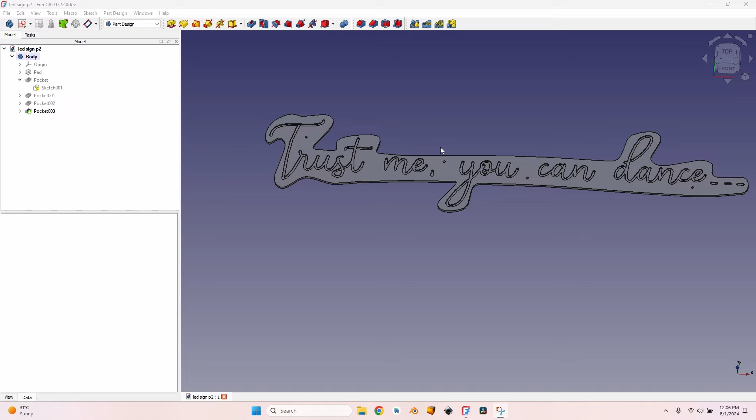Welcome to the second part of our sign making tutorial about making a piece of acrylic, milling it on the CNC in order to fit some LED strip and then cover it with a special silicone tube. In the first part I have shown you how to modify the font, how to recreate it in Inkscape and then import it into FreeCAD in order to get the consistent width channels required.

We have also created some holes in the end of each word to fit the wires and some holes for fixing the piece of acrylic onto a piece of wood. It's the way it's going to be installed in the end. And in this video I will show you how to create the path from start to end and how to mill it on the CNC.

The biggest challenge was milling a piece with a 2.1 meters length on a CNC that only has a table of 80 by 80 centimeters. That's my CNC. It's pretty small. I have custom built it this way because I have a small workshop, but I need to make certain things larger from time to time, so I will show you the method that I use to make that.

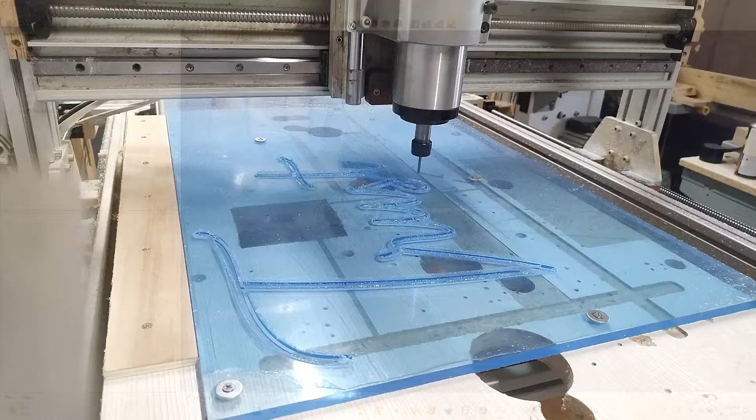One of the biggest challenges when milling acrylic is the cutter, the feed speed, the spindle speed. So let me explain a little what I have used. I have used a 4mm end mill, and the speeds that I used with that cutter are 2500 millimeters per minute and a spindle speed of 11,000 RPM. I've used those values with a step down of 1.5 millimeters.

Those are the values that I found suitable for this type of material on my machine. You might want to modify them a little to adjust them depending on the machine, on the cutter that you have, but for this type of cutter and my machine, this works like a charm when cutting acrylic.

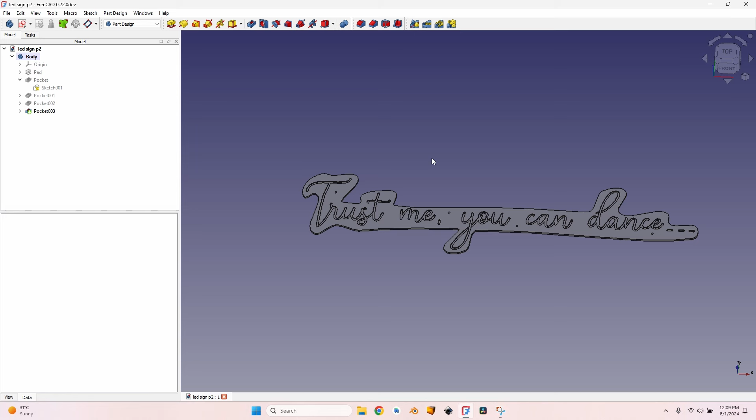So let's get started. I will select the body, the sign, go to the CAM workbench and create a new job. Everything seems okay, but it isn't, because I want the sign to be on the y-axis. I want it to be rotated on the y-axis because that's the direction that has clearance. I can move the piece of acrylic outside of the table.

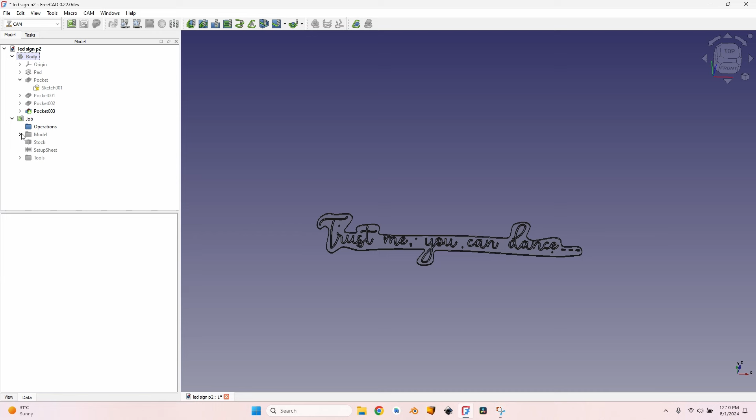So first of all, click OK on the job. We will come back later to the job to edit the tools and everything else that needs to be edited. But first let's go to the job, open the tree, open the model, select the copy of the body that has been automatically created, go to edit, placement and rotate it around the z-axis 90 degrees. Click on apply, click on OK, and now double click on the job again, go to the setup tab and click on the refresh button next to extend models bounding box.

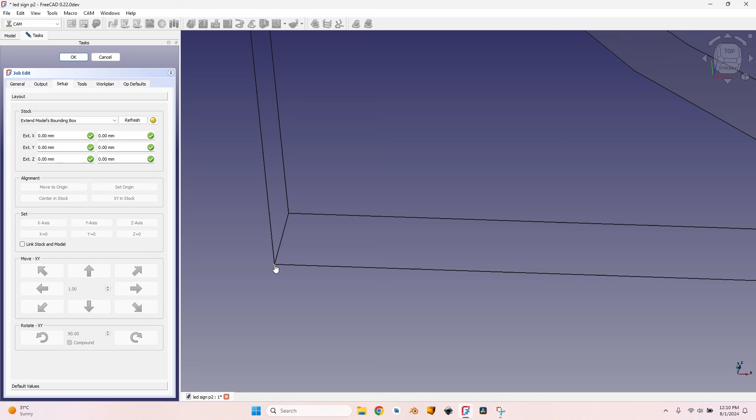Now we need to place the origin here, so I will zoom in, select the point in the corner and click on the set origin button. Now you can see that the origin is correctly placed. The piece of acrylic is vertical, it's on the y-axis just as I want, so I can move it outside of my CNC. And now let's go back to the tools menu, click on add to add a new tool controller to the job. I will select the 4mm end mill, as I've told you that's what I'm going to use. It's an upcut bit.

Click on open and let's give the horizontal and vertical speeds of 2500 millimeters per minute and the spindle speed of 11,000 RPM. I can now remove the default tool, I don't need it anymore. Go back to the setup tab. Here at the bottom you have default values. I will set a step down of 1.5 millimeters. I want to set it for the entire job so I won't make any mistakes and maybe damage the cutter. I have broken several tool bits when trying to find the right solution for milling acrylic.

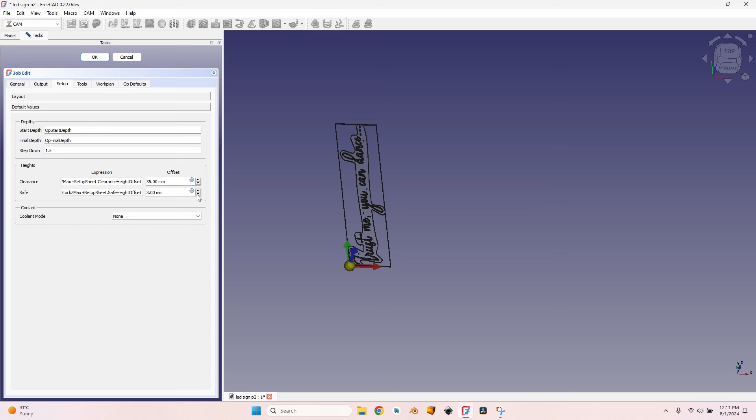I will also set a clearance of 35 and a safe height of 3 millimeters. Go to the output tab, make sure the processor is the correct one. I won't enter a file name, it will default to the file name of the FreeCAD file, so it's okay for me. And click on OK to close the job. Now we need to make three operations.

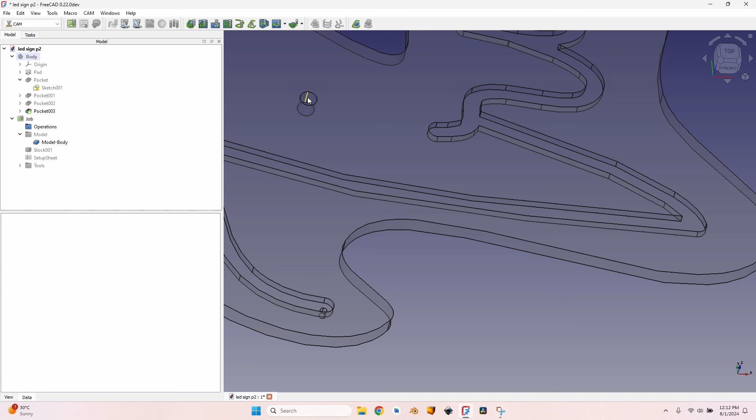The first one is to mill the holes, the small holes in the end of the letters for passing the cables, the large holes for fitting the piece to the piece of wood. We also need to make the pockets and the profiling, the cut of the outside, the weird shape that we have created for making a fun shape for this sign.

So the first thing that I need to do is click on the job, go to the helix button. It will take some time to open up the dialog because FreeCAD tries to automatically detect all the circular holes in my file. So I have all the 4mm holes for the cables and the 10mm holes for the screws. Go to the operation tab, change start from outside to inside. I don't want to have a little piece of acrylic left in the middle because it might break, move around in the space and maybe damage the cutter.

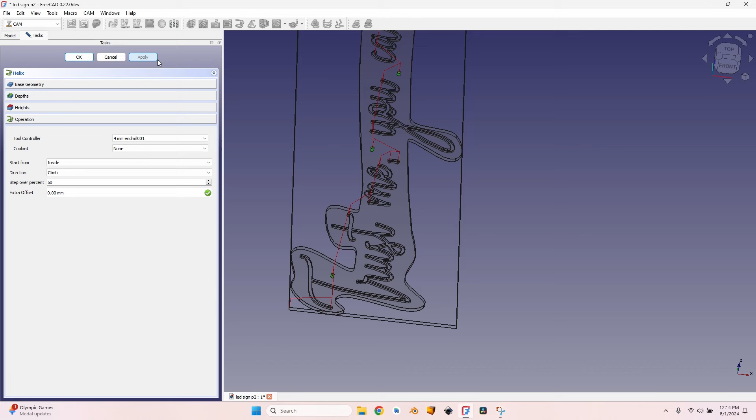Leave the step over to 50%, click on apply, and you can see that the path for milling all the holes has been generated. Click on OK. The operation is all that I need, and now let's create the pocket. For making the pocket, I will set a top view and holding Ctrl down, select all these faces that compose the text, the comma, the dots at the end. Make sure you select just the faces, not lines.

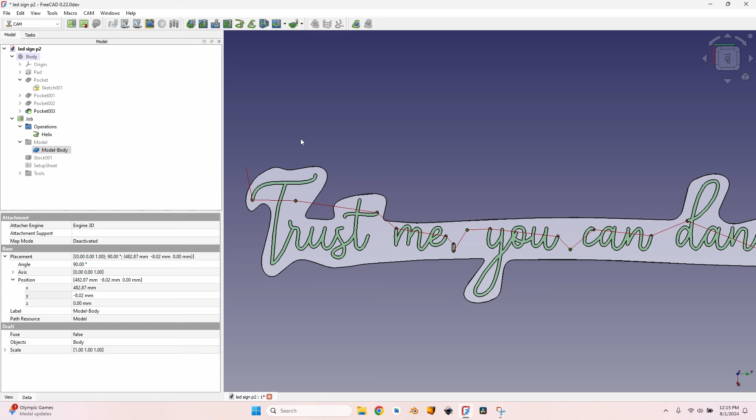And now, after making sure everything is selected, I will use the pocket button. I will modify the pattern, set it to offset. Zigzag in such thin spaces would be a mess. Set a step over of 70%. That should be enough in order to correctly clear the inside. The outside will be cleared anyway because the pattern is set to offset.

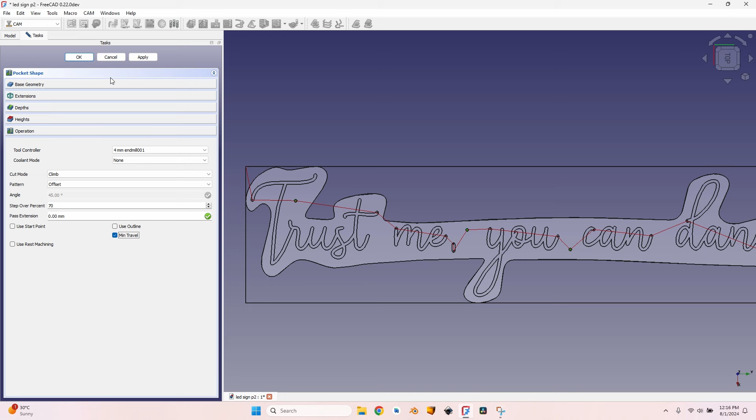Go to the depth tab, make sure you have the correct step down, the correct start depth and the correct final depth. I want 5 mm deep channels in the acrylic, so it's okay, a start depth of 10 and the final of 5. I will also check the min travel. I want to reduce the air time as much as possible. The movement when the cutter head is not cutting, I want it to be as small as possible, because anyway it is a pretty large project and it will take some time with such a small tool.

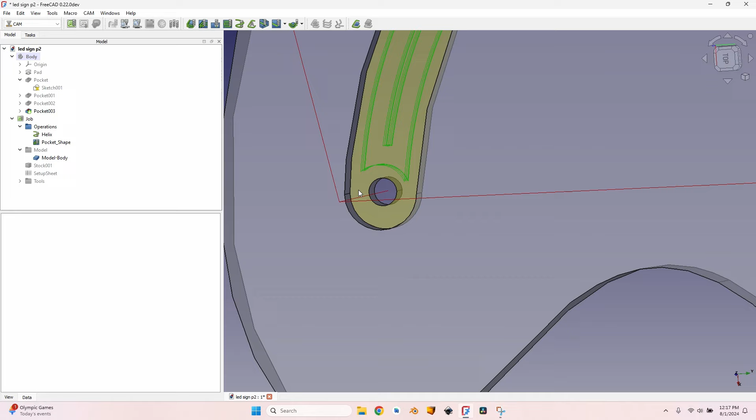And I can now click OK to generate the path for the first time. It will take a lot because FreeCAD is not the best when working with Bezier shapes. So once the path is generated, let's make sure everything is okay. I kind of know where there are some problems. You can see here at these holes, since the cutter head won't fit through this small piece of acrylic next to the holes, it simply won't cut this whole piece, which is something that I don't want. It happens around all the holes. You can see here also the lines, the comma.

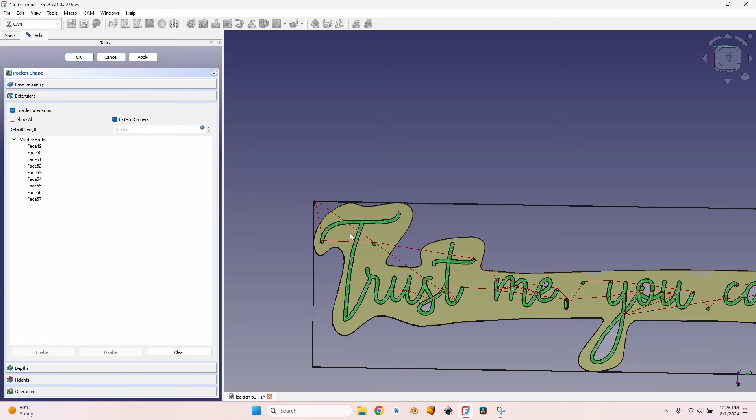So double click on the pocket shape again, go to extensions, check enable extensions. I know this is an intense computing thing and it will take some time, but it is something that I have to do. But unfortunately the extensions simply don't work. You can see here it won't see any edge to extend even though there should be. So we have to find another solution. Click on cancel. Don't ask me why FreeCAD is recomputing everything. When clicking cancel, it should just revert to whatever was in the first place, but this is the way it does things.

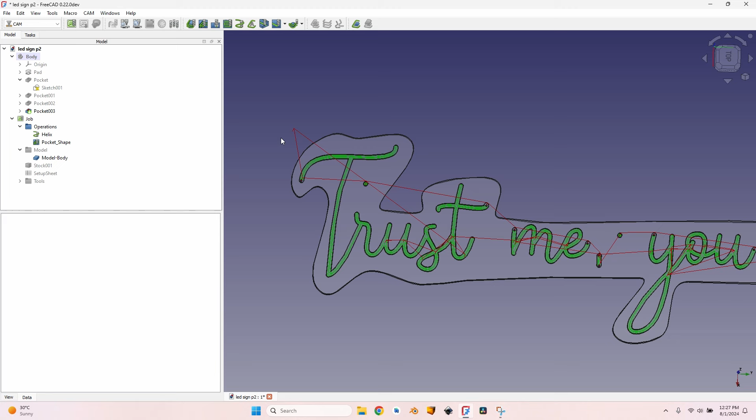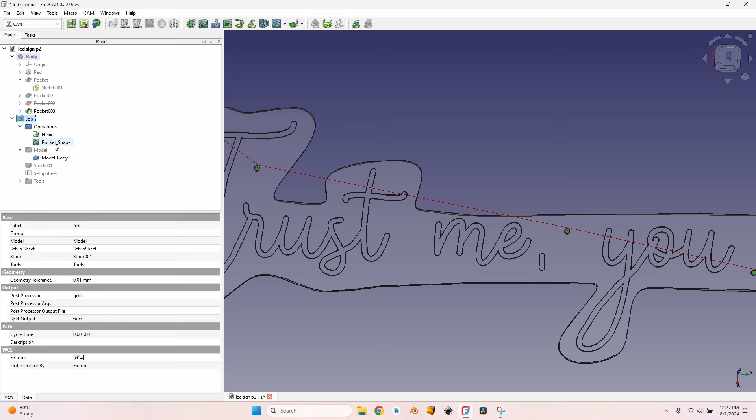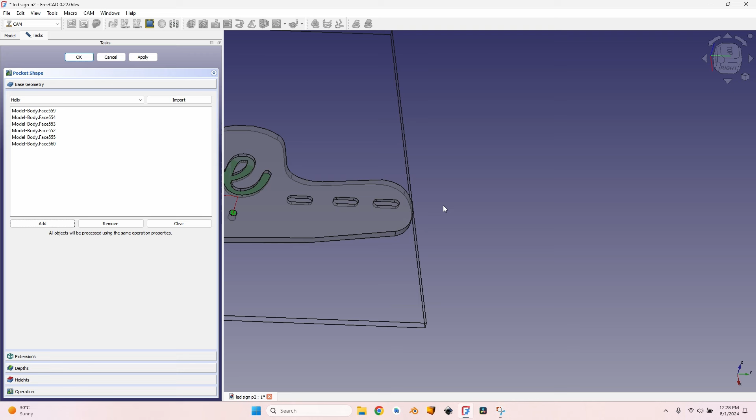But there are some issues with the pocket because the face names have changed and the code in the CAM workbench hasn't yet been changed with the topological naming problem solved. So let's clear the list and re-add the faces again. Click on OK, and now the path should be generated correctly.

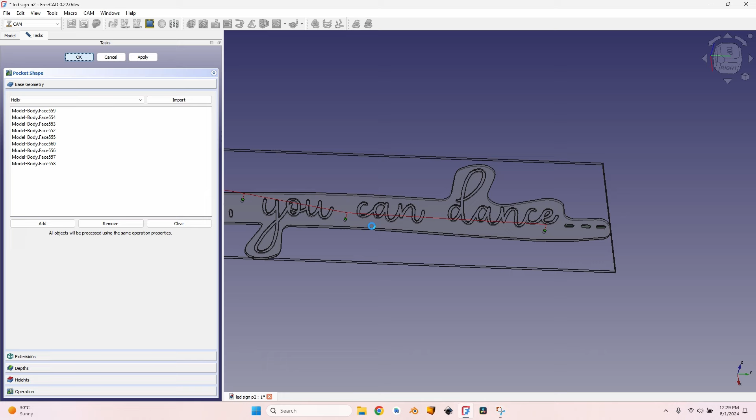Of course, you can see that all the holes at the ends of the letters are now not included in the helix operation, and that's something I will show you in the end when exporting the job, how to solve that issue by exporting the G-code files with different features in the body, suppressed or not. So now my CNC will mill the entire shape of the letters, no stopping at the end where the holes were. Of course, I will have to make separate exports for the pocket shape and the helix.

I could open the properties of the pocket shape, and as you might have seen in all my other videos, when milling wood I always change the keep tool down from false to true.

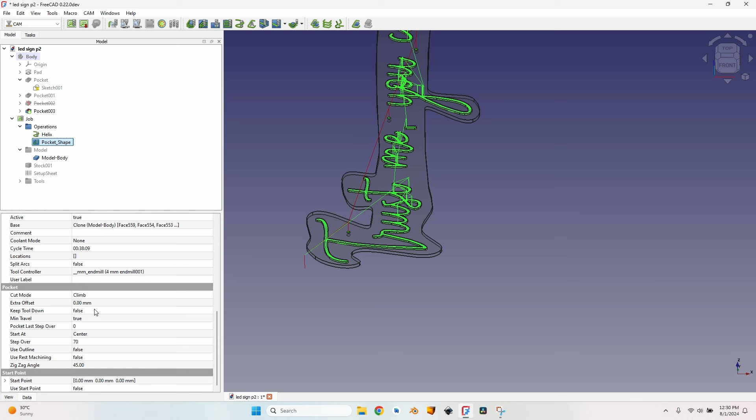This time I won't do that because I'm milling acrylic, and the lifting of the cutter head gives the cutter bit some time to cool down in order to avoid sticking the material to the cutter head. So this time keep tool down is okay to be left to false; even though it might take more time, it's safer this way.

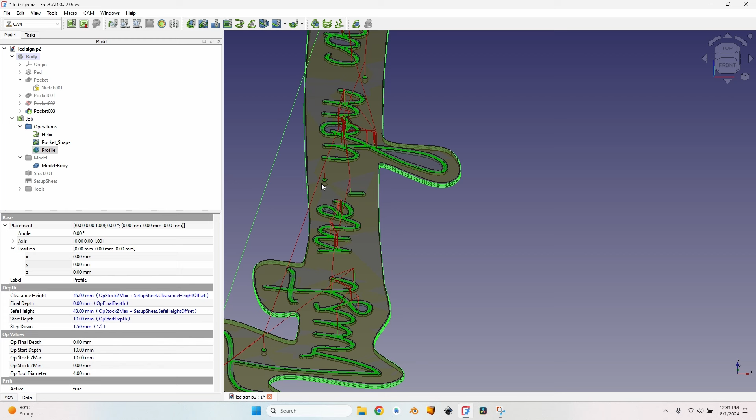Now let's do the final operation, the profiling. Just leave everything as is. Click on apply and you can see the profile milled. You can also add some tags that you can cut by hand, but for holding down the material on the table I will use all these holes. I will first mill them, then stop the machine, put screws into these holes, also drill some holes at the edges of the outside pieces, in order to not damage too much material, because all these large pieces can be reused, of course.

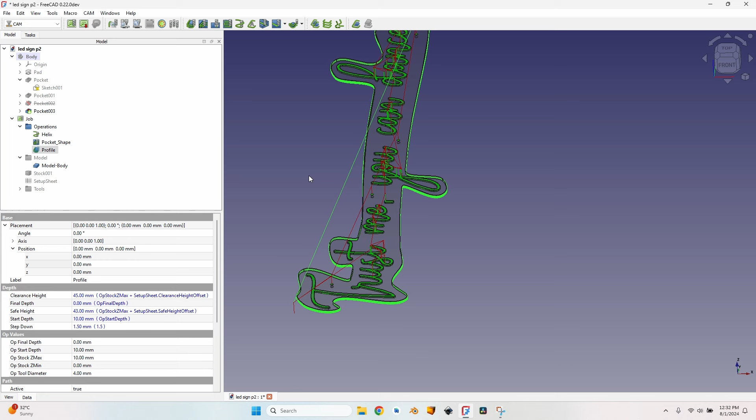And now I want to export all the operations needed. As you remember, the holes in the ends of the letter are not available anymore, but I will show you how to split the operation into 3 separate files so I can move the sign around. There's one more thing that I need to do in order to correctly shift the piece after milling the first part and after milling the second one. I need to add some reference points, and because this piece is 2.1 meters long, I will divide it into 3 separate cuts, 700 millimeters each.

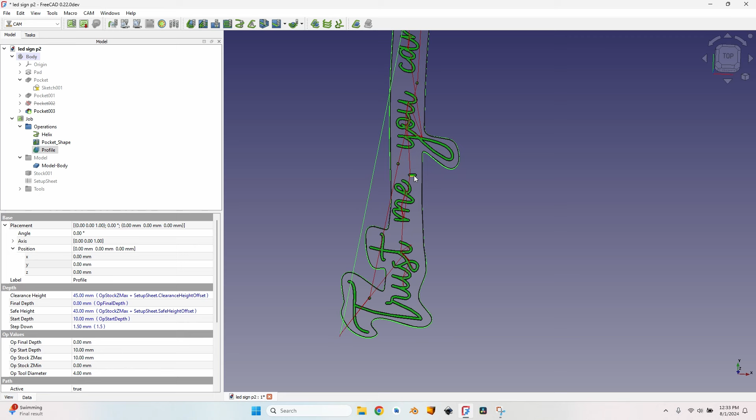So I need to somehow add some reference points, and I don't want them to be on the piece itself. Of course, I could use the comma or these holes as a reference point, but let's imagine that I don't have all these shapes at the exact same Y value. I will have a stopper here on the X axis, so the X will be the same, but I will need to manually adjust the Y axis.

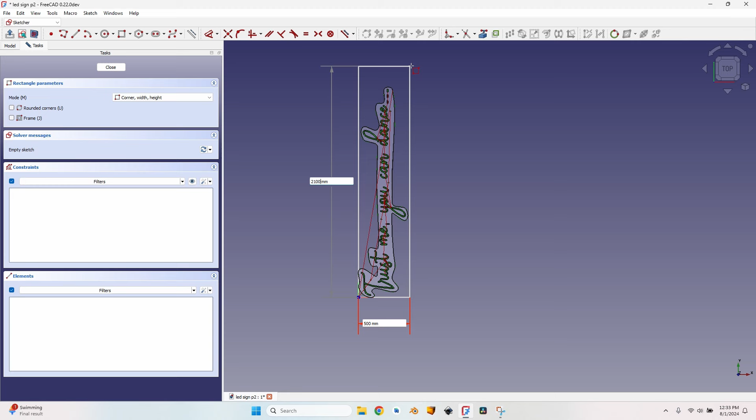So let's go to the Part Design workbench, create a new body, create a new sketch on the XY plane, make a rectangle, and I will give it a 500 by 2100 millimeters dimension. This is the dimension of our stock. Click on close, make a pad of 10 millimeters, and now you can see it covers the other sign. And I want to place 2 small cutouts here and here in order to be able to align when moving the part.

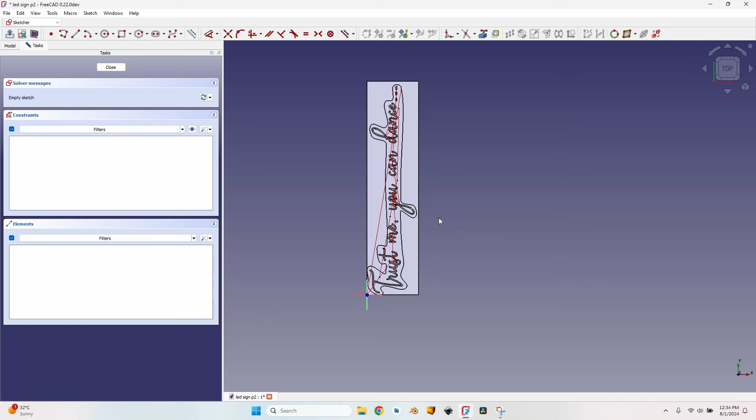So select this face, create a new sketch, and as I've told you, I want to split this cut into 3 separate cuts, each 700 millimeters, but I will actually create 3 cuts of 750 millimeters because I want some overlapping where the reference points will be. So I will create 2 rectangles. Let's give these rectangles an equal constraint for the bottom line, an equal constraint for the vertical line, and let's set a horizontal constraint. I want them to be at the same height.

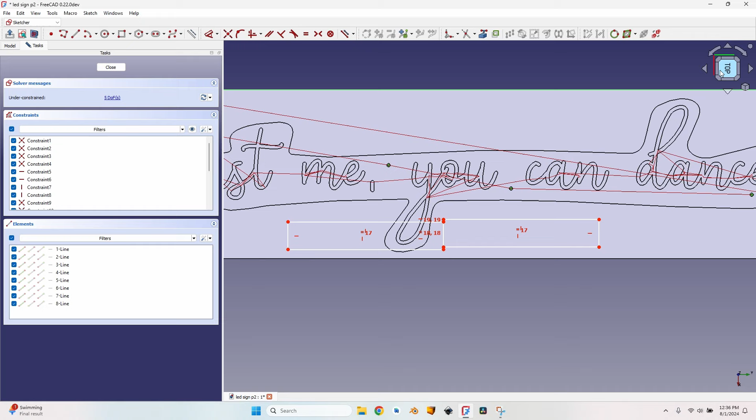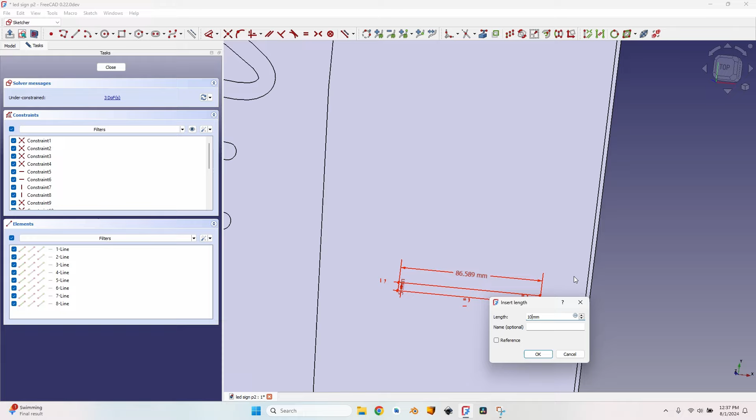And you can see something odd happened, because I used a horizontal constraint, but if I look at the coordinate system in the bottom corner or at the orientation cube, I'm actually rotated. So I have to delete this horizontal constraint, move them again, and set a vertical constraint, because this is the vertical of my sketch. Let me rotate the view so it's easier to use the correct shortcuts: I for a vertical distance constraint of 5 millimeters, and the length of this segment 10 millimeters. So my reference points are now correctly sized. I just want to position them.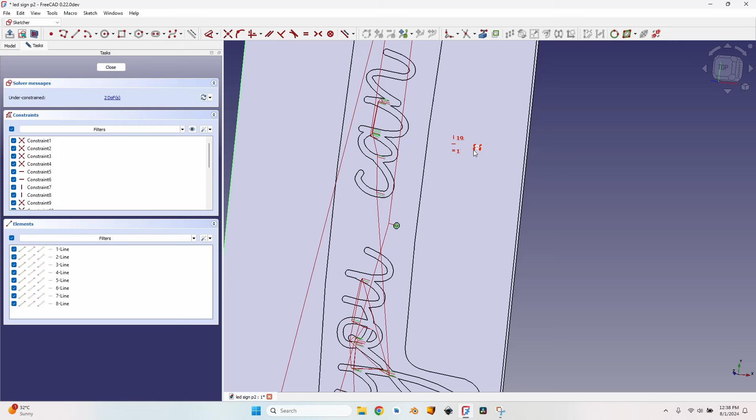For this one I will give a height of 710 millimeters. I will make the first cut 750, but then just move the piece 700 and it will start below this reference point, so I can move the cutter head to the correct position and make sure I have moved the piece as it should. And for the second reference point I will give it a height of 1420 millimeters. It still has a degree of freedom, the horizontal distance. I will set a length of 490 just to be at the edge to waste as little material as possible.

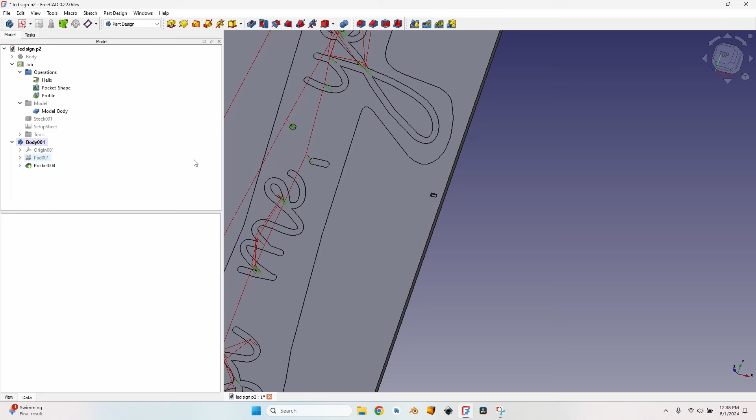Now I will close this body. You can see these 2 reference points; I have to make some pockets with them. I will make 5 millimeter pockets, and I will rename the body reference points. And now go back to the job to use those reference points. Double click on the job, go to the general tab. Everything will move pretty slow right now. I will show you in just a couple of seconds how to avoid this slow movement when making modifications to your job, such as adding a new body. But now I have to wait, and then I'll show you how to do things faster.

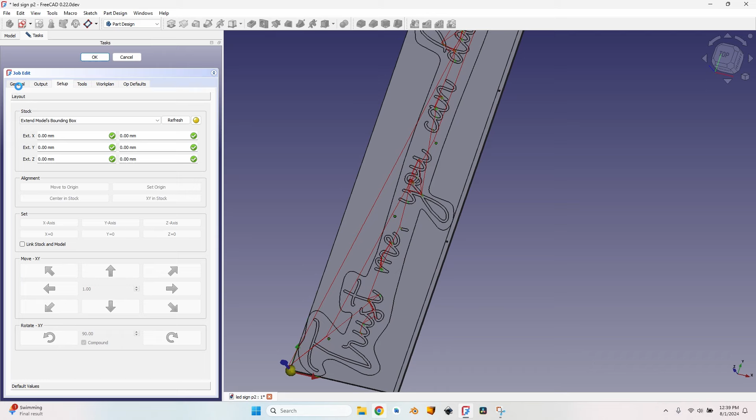For each modification it will take a long time to calculate everything. I will just click cancel. Again, it will take some time. I should have done this before opening the job. So before opening the job and modifying all the stuff here, I will select all the operations, go to the CAM workbench of course, and click on this button, toggle the active state. I want them to be disabled, and now everything will compute much faster.

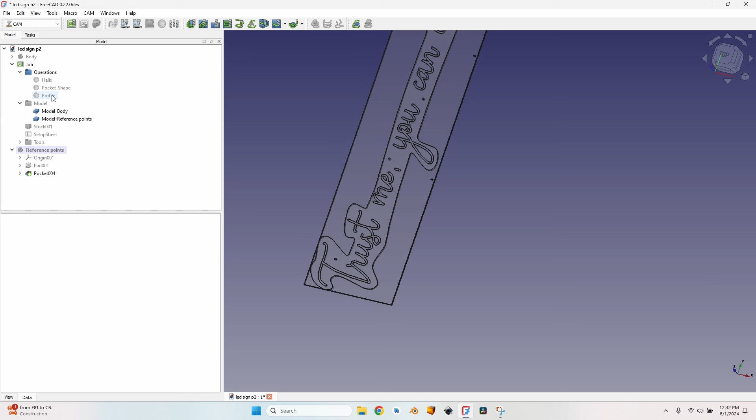So now double click on the job, go to the general tab, click on edit button, also add the reference points body, click on OK. You can see how fast everything moved. Of course, when re-enabling all these operations, I will have to wait for them to recompute, but it's going to be just a one-time thing. So now I have the body with the reference points.

Go back to the job. This is the part where I have to re-enable all the operations. Well, I won't re-enable the helix because I will export the helix later. As you remember, I have removed some holes from here and the helix won't mill them. I will activate them after exporting the pocket and the profile.

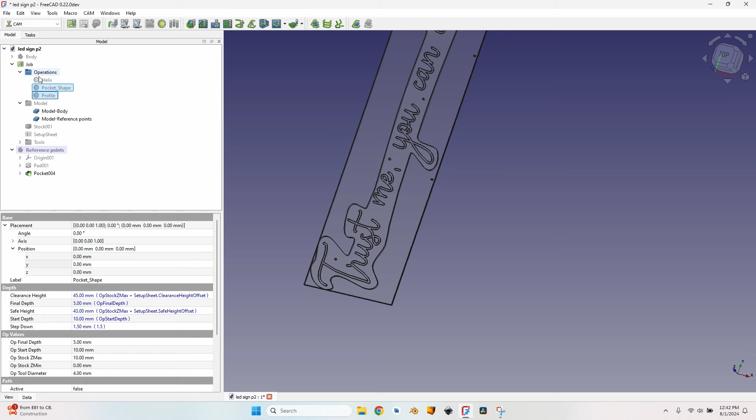I need to create a new operation. I need to mill these holes. So simply select them, go to the pocket operation, select offset, leave a step over of 100, it doesn't really matter. Click on OK, and now you can see the milling of the two pockets for reference is set.

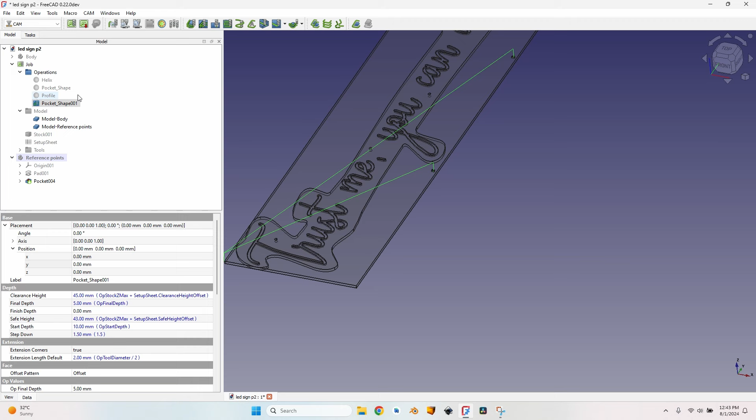Of course it mills both of them in the operation, but we will limit them in just a couple of moments. Make sure the pocket shape is selected in the tree, go to the CAM menu, path dress up, and select the boundary dress up. By default I have extensions of 1 mm on all sides and the constraint to inside checked.

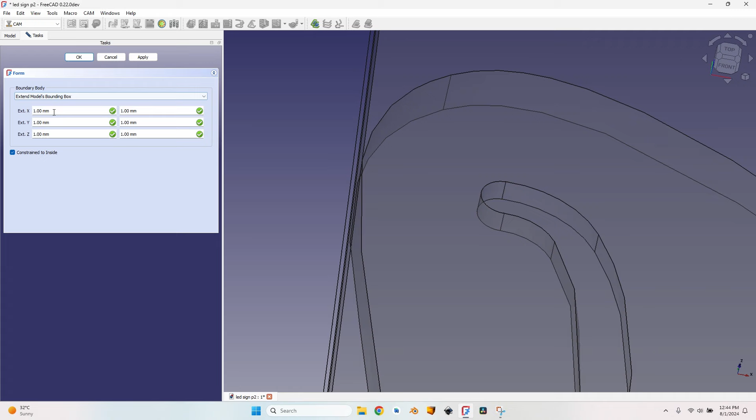If I use this setting here where the final shape is barely touching the edge, the cutter head won't fit and it won't cut this piece, so I will extend the start of the X with 4 mm, the diameter of my cutter head, and also the extension on the Y at the beginning is going to be 4 mm. The Z I will leave it with 0 extensions, I don't care about the extensions on the Z axis.

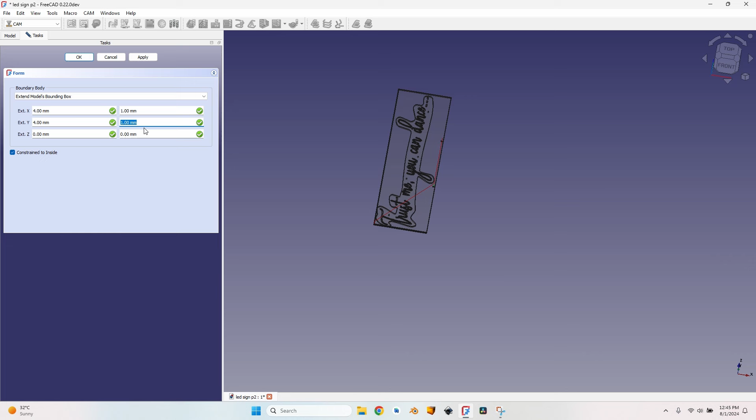For the end extension of the X axis I don't need to make any extension, the cutter head will fit okay. But I want to extend the Y on this direction to mill just 750 mm. I don't have an option to set a distance from the origin, just a distance from the end. I have created this piece, the reference body, with a length of 2100 mm.

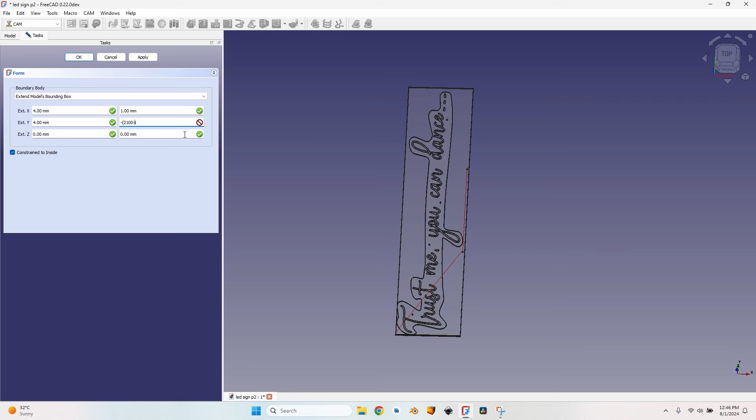So if I want here to have 750 mm, I will subtract, and I will use parentheses to be easier to understand, the total length minus what I want to mill. I want to mill 750 mm, so I want the extension to move with all the remaining length that there is. So now I can click apply, click OK. You can see it has limited this operation to only the first reference point.

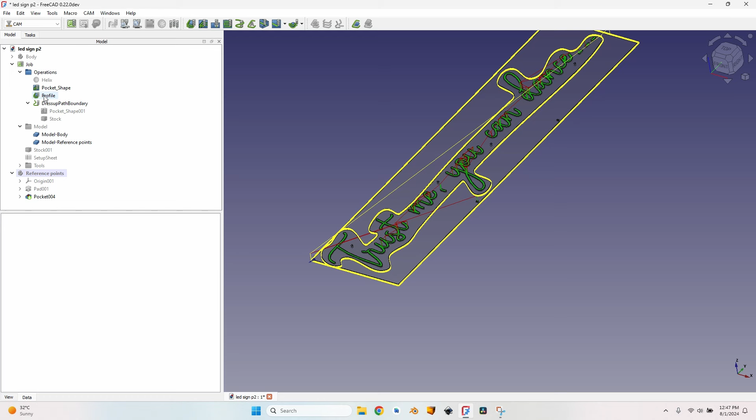Now let's enable the pocket and the profile. The operations are active again, you can see them here, but for the profile I have to make some modifications. You can see it also cuts the outside of the reference point's body. I don't want that, so double click on the profile operation, go to base geometry, and let's find a way to only mill this face.

So move the mouse around until you can select only this face, click on add, click on apply, and now it will ignore the other shape. If I don't add any geometry, it will automatically mill the outlines of all the bodies in the job. So now I can click OK, everything is okay.

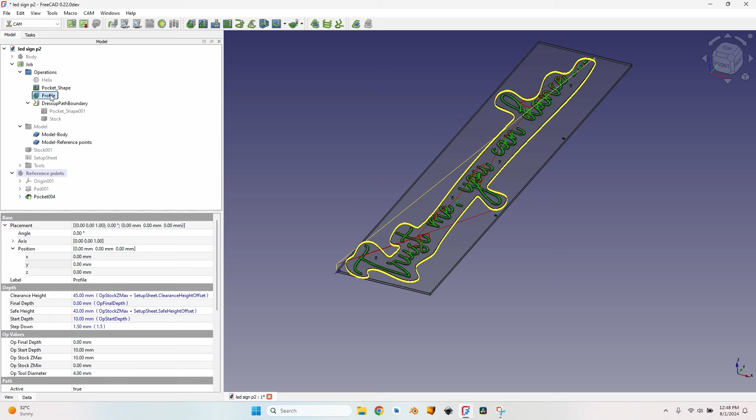I just want to also limit these two operations to the length of my CNC table for the first part, so select each of them. Unfortunately, there's no option to use the dress up for a group of operations, but I have a little thing that will speed things up. Select the profile, go to the CAM workbench, go to path dress up boundary, and instead of extend models bounding box, I will choose use existing solid.

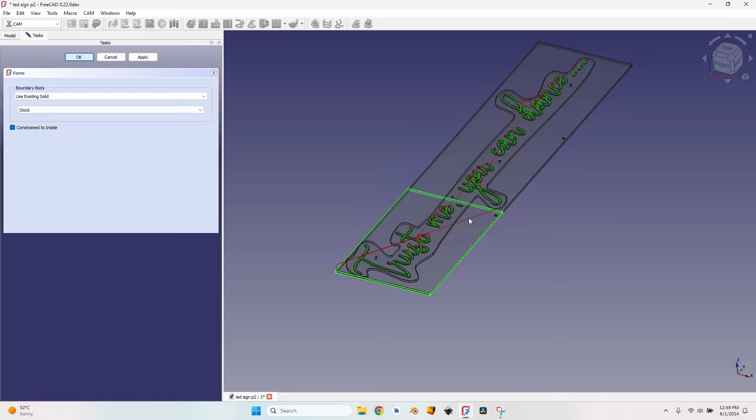And from the drop down list I will use the stock that has been created for the previous boundary dress up, and now I can click on OK. You will see the profile limited to this boundary too. Make sure that it's going to cut at these edges, everything should be okay. Here it ends and it only cuts this part.

Let's do the same for the pocket. Go to CAM, path dress up, boundary, do the same thing, select use existing solid, select the same stock.

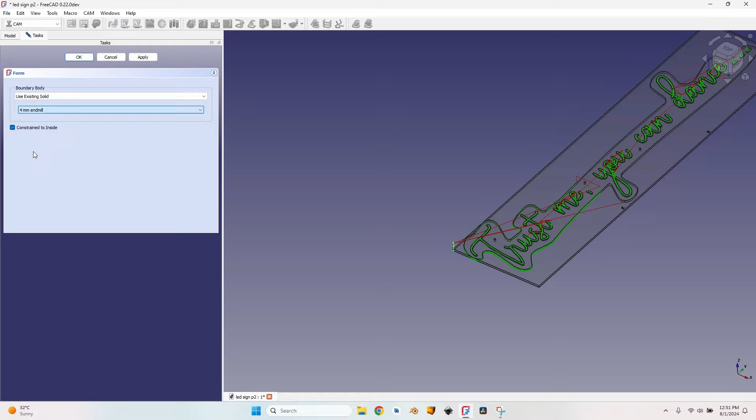You can also select the one from the previous operation, but just use the base one, the first one that you have created, because for the next two steps, the next two cuts, we will modify just that stock in that operation and it will automatically update all the other operations. This makes everything much faster. And now you can see that all my operations are limited to the 750 millimeters first cut. I also have a reference point here which will give me the coordinates for the next operations.

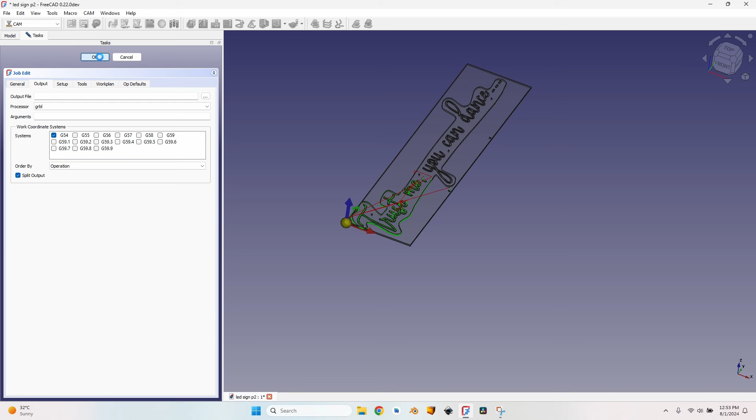I now export each of these operations. I prefer to export them into separate files. In order to export them into separate files, I have to go to the job, go to the output tab, check the split output button and change order by to operation. This way it will create one file for each of the operations. I think it's much safer and I can make a pause between operations to move some clamps, to add some screws or whatever I'm doing on the CNC.

And now I can select the job, click on the post-process button. It will generate 3 separate files, one for each of the operations. You can see here I will save them one by one and I can move to the CNC to mill the first part. Well, not exactly, because I haven't created the helix. I will create it after exporting all the 3 pieces for the pocketing and the outline and the reference points.

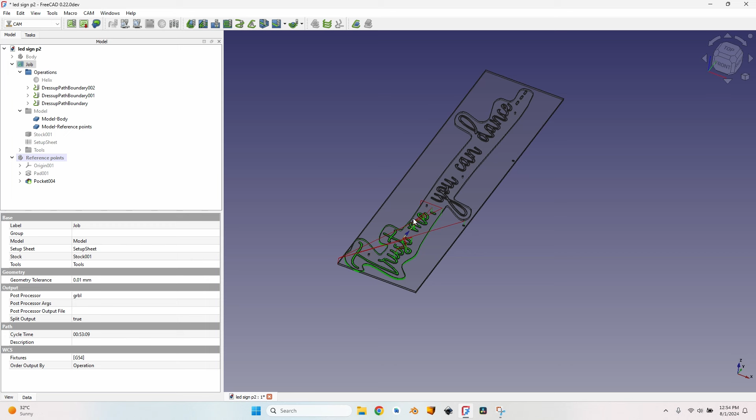I will then go back to the initial body, modify, re-enable the pocket for the holes at the ends of the letters, and then reapply everything, the limitations, so I can have also the files for the holes, because I will first drill the holes, fit the piece of acrylic to the table using those holes for screws, and then I will mill the pocket and the outline.

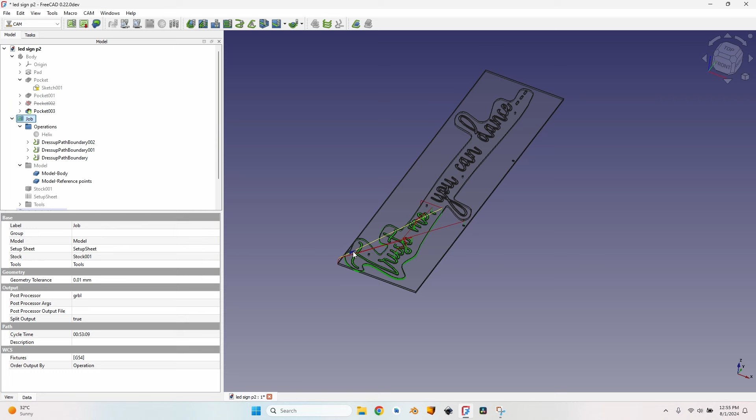So now how do I move everything so I know how to correctly position everything? Well, open the job, select the model, the body, go to edit, placement, and for the Y subtract 700 millimeters. As I've told you, I want some overlapping here, so I have created the cuts using a 750 millimeters boundary, but I want some overlapping, so I will only be moving it 700 millimeters. Click on OK. It will take some time to recompute everything.

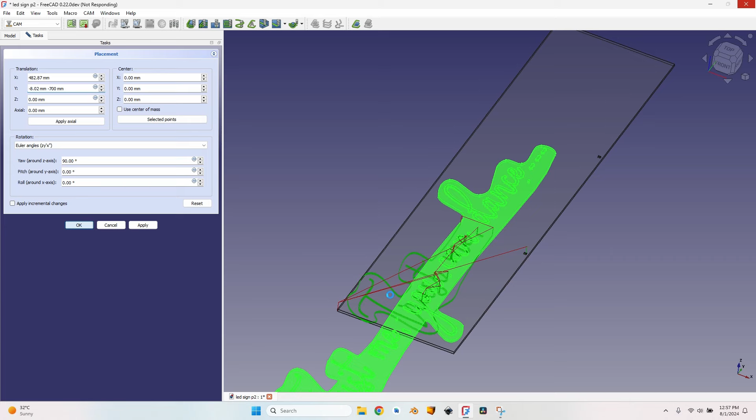We will have to do the same for the second body for the reference points, because I want the second reference point to be milled. Let's also move the reference points, go to edit, placement, and subtract 700 from the Y. And now, after moving also the second body, the stock from the dress up has been correctly calculated, otherwise it would simply subtract from the position of the second body. Now that everything is correctly placed, you can see I will be able to mill the second part.

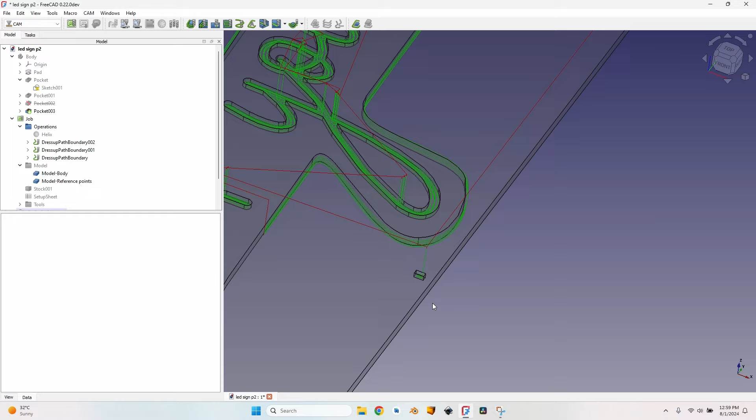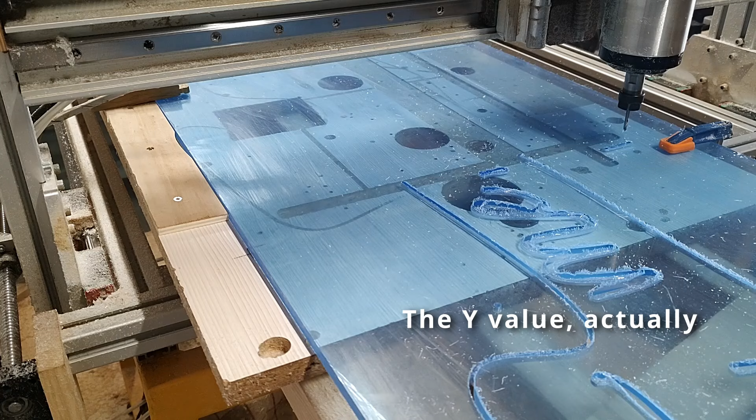I also have the reference point milled, and that's very important because when moving the stock after making the first operation, I will go to the G-code for this operation and I will check the Y value for milling this small space, move the cutter head to that position by hand and make sure the stock is correctly placed, and the cutter head will just touch this face that, as you know, is already milled from the previous operation. It will also mill the second reference point, and this way I will be able to mill everything without losing position, actually with a proper movement of the position.

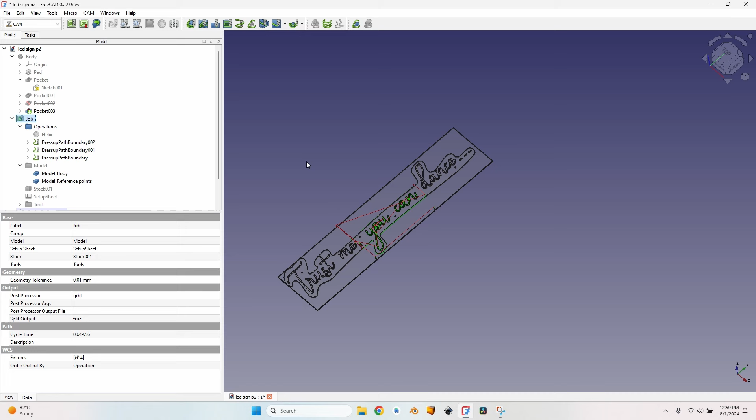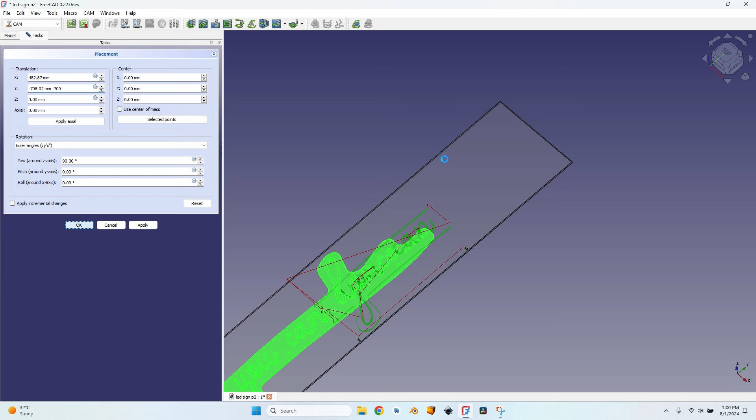So now I will export these files too. I will rename them to step 2, and then after doing this I will repeat what I already did. Go to the model, go to edit, placement, subtract another 700 millimeters, do the same for the second body, and I will have the third operation with a reference point included in it, so I can move to the G-code, see the coordinate, move the cutter head manually to that position and make sure it aligns with the stock that I have moved. Now let's also move the reference point's body.

Go to edit, placement, subtract another 700 millimeters. And as you can see, the third reference point is included in my cut. I can use it to position the cutter head there and then move the stock around on the Y-axis as I've told you, and as you can see in the images, I have a limiter, a straight line on the Y-axis, so I can keep the same X anytime in any position for the stock.

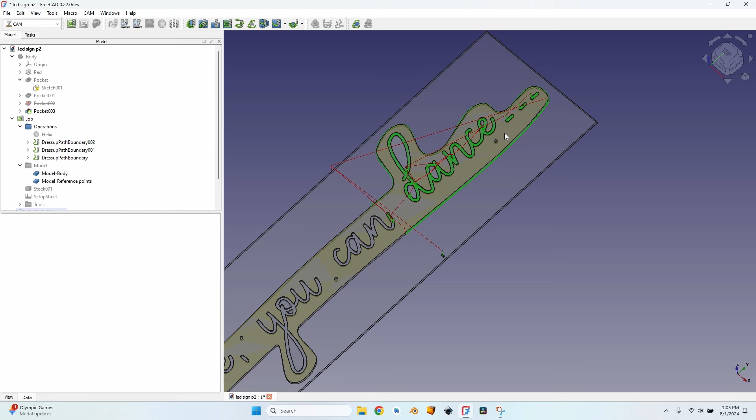As you know, I still have something to do, the helix. I haven't exported the holes and I for sure need them in order to be able to keep the material to the table and because they are needed for the project. So select all these 3 dress ups, disable them, change their status from active to inactive, and then re-enable the helix. But I only have the large holes because, as you remember, I have disabled this pocket.

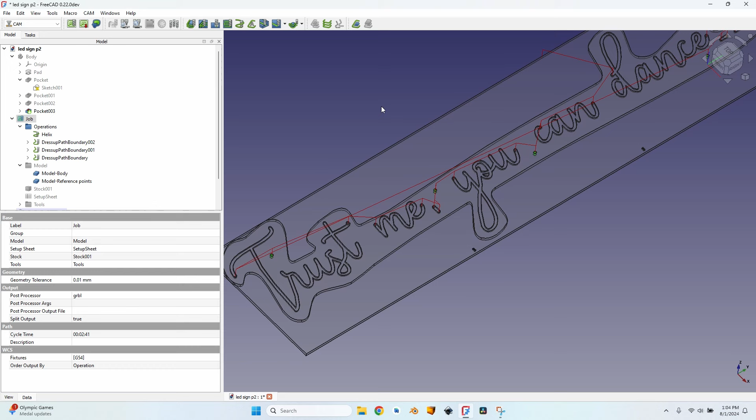So right click on it, click on suppressed, right click on the body, go down to recompute object. Now go back to the job and click recompute object, and all the holes appeared and the helix is milling them as it should. Now let's do the limitation, the dress up, the boundary for the holes too, because I need the exact same dress up.

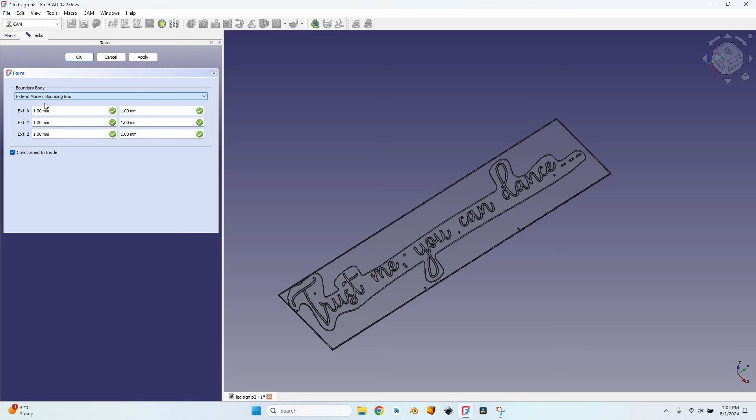This weird line here is because this is where my origin is. So I will export them in reverse order. Go to the helix, go to CAM, path dress up, boundary, select from the boundary body, use existing solid, just as we did with the previous operations. Select the stock here, click on apply, OK, and surprise,

one of the nice things in FreeCAD, there are a lot of bugs, but you can work with them. There are a lot of workarounds for each of the bugs. So in another software I would probably be blocked here, I wouldn't be able to do what I want to do, but I can find a lot of workarounds in FreeCAD, so this is the nice thing. Even though there are a lot of bugs, I can solve them using other methods.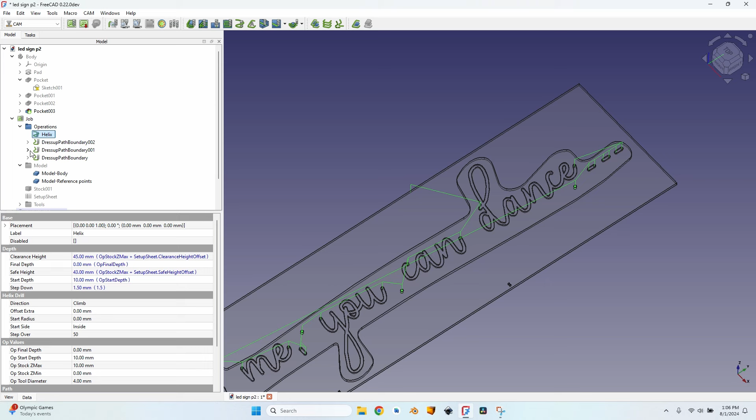So the dress up path is not something that works on Helix for now in this development version. Of course, probably in the final version it will work, but for now dress up on Helix in 0.22 doesn't work. So I will delete the dress up, select the Helix, and I will do a little trick. Open another operation, make its stock visible, go to the helix, go to the base geometry, so select all the holes, almost all the holes, click on remove. Now I will select the remaining ones, click on remove again, it moves kind of slow.

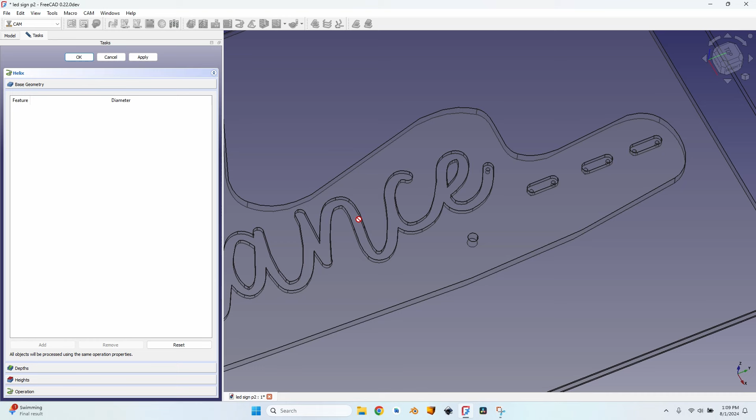And now let's manually add. Well, it seems I cannot manually add holes to the helix in 0.22, which is something that I don't like, but there still is a way of doing things. Click on reset to recreate all those holes that it automatically generates, and then we will have to manually delete the ones that are not inside our stock, the ones that we have reused from the dress up operations.

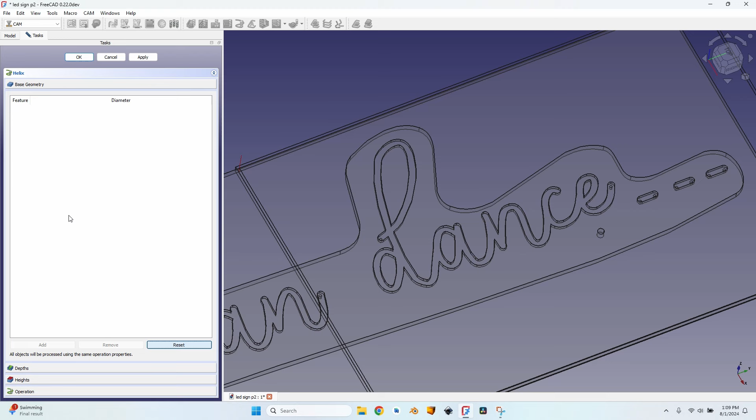Remove all the holes that are outside, export this job, then do the same for the second placement. Move the body back a little bit higher with 700 millimeters. Remove all those other holes. So let's see which one is highlighted. Remove. After removing all the holes, I can now see that the operation is limited correctly to this shape. Well, it's not limited, it's something that I have to do manually, but I can live with it. I'm sure it will be fixed very soon. Click on OK.

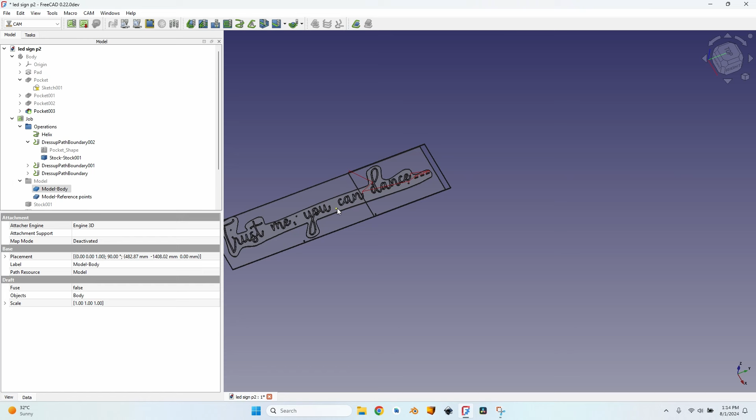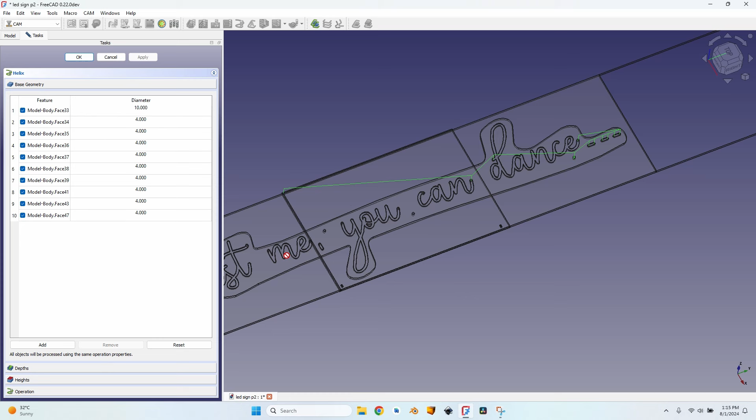Now export the operation and let's change everything again. Let's move the body. This time I will add 700. I want to move it back high. Also move the reference point's body. Also add 700. Click on OK. And because the dress up doesn't work, I have to go to the helix again, go to the base geometry, reset everything, then remove all the holes and so on for this operation too, and then do the same for the last part, the last remaining part.

So after removing all the holes outside of this dress up, I will move to the third part, do the same for the first piece of the sign. I have exported them in reverse order now because, as you remember, I have disabled the helix in order to be able to mill the pockets correctly. So now I do this in reverse. Make sure you save the file correctly.

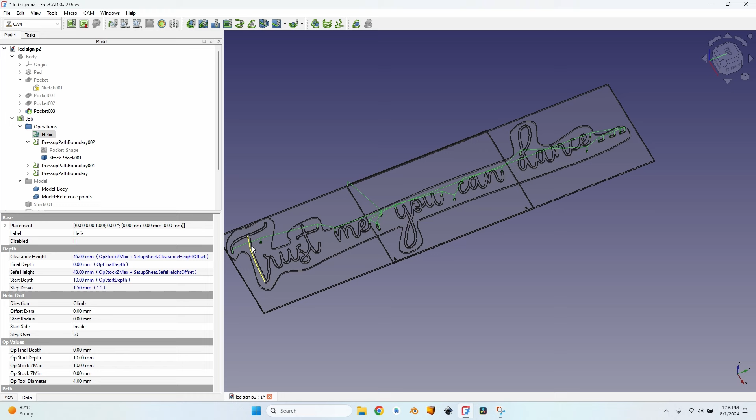So then I will go to the machine, drill the holes. I can use these 10mm holes for holding the piece to the table, but before milling the pocket I won't be able to use these holes because the cutter head will move through here to mill the pocket and it will hit the screw. So I will just use one screw, still use the clamps that I've used initially, and only after milling the pocket I will be able to use these holes to hold the piece down with screws for the final pass, the profiling.

So thank you for watching. I hope it was a nice project for you too. I loved making it even though it was challenging, but that's what I like to do, to discover ways of doing challenging stuff.